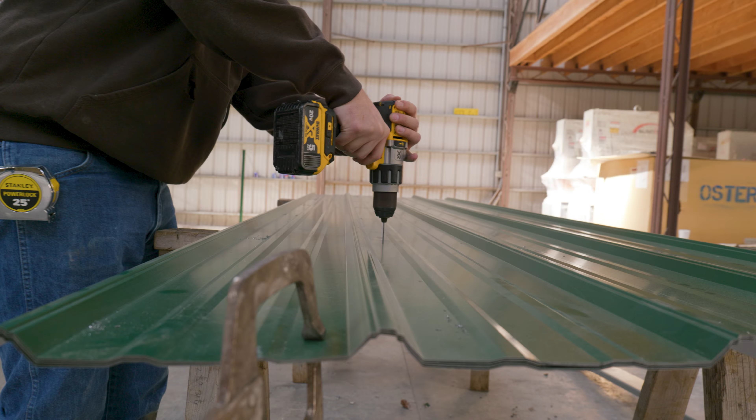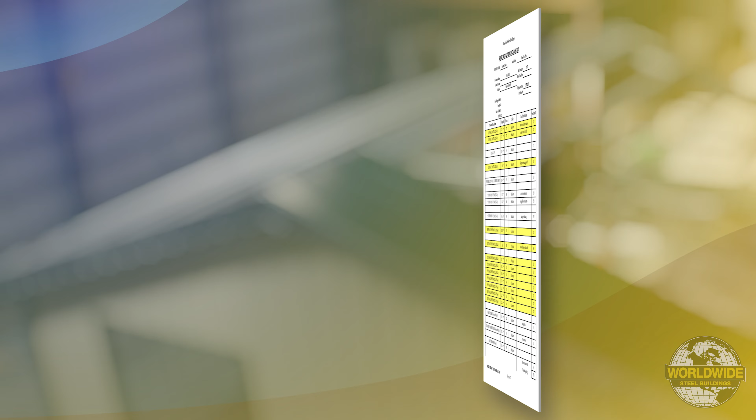Now that your roof panels have been pre-drilled, it's time to install them along your roof. First, you'll need to identify the panels that are supposed to be installed for the roof surface you're working on. Refer to the sheet metal trim package list located in your ship list. This page will indicate what panels and lengths are to be used at each surface of your building.

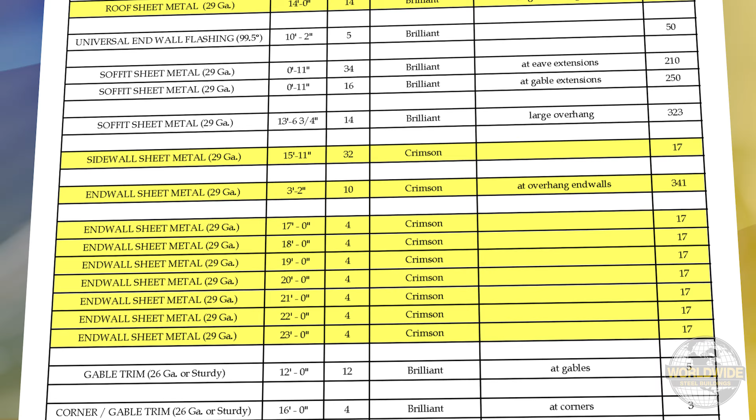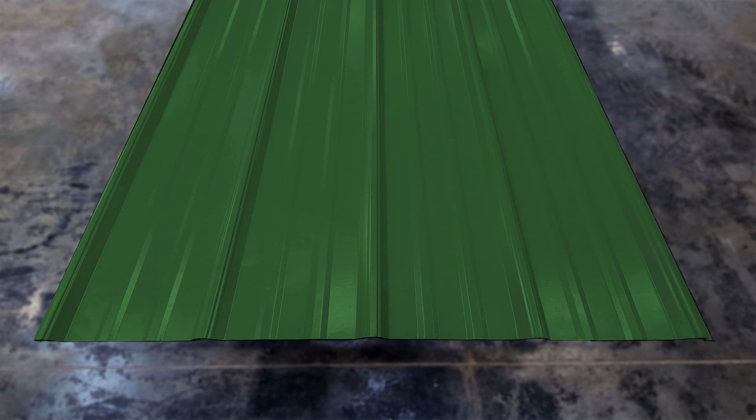Worldwide Steel typically bundles panels together for each surface when you're building, but it's a good idea to verify you have the correct panels before pre-drilling and installing. Worldwide Steel's typical roof panel has a total of 5 high ribs and 8 smaller intermediate ribs. The high ribs are spaced 9 inches apart. The panel is designed to lap and has a 36-inch coverage. This is the dimension from the center of the first high rib to the center of the last high rib.

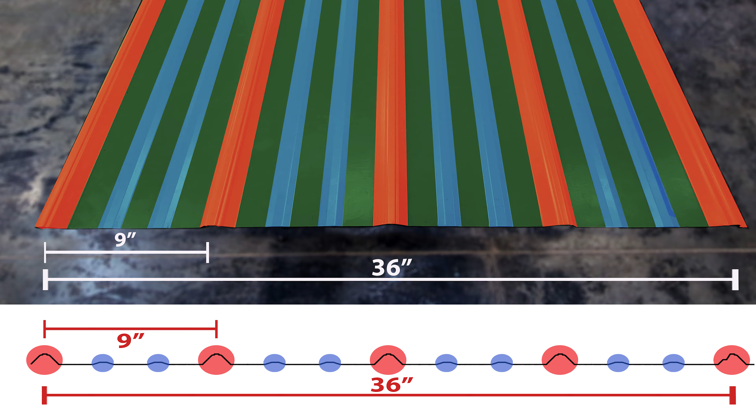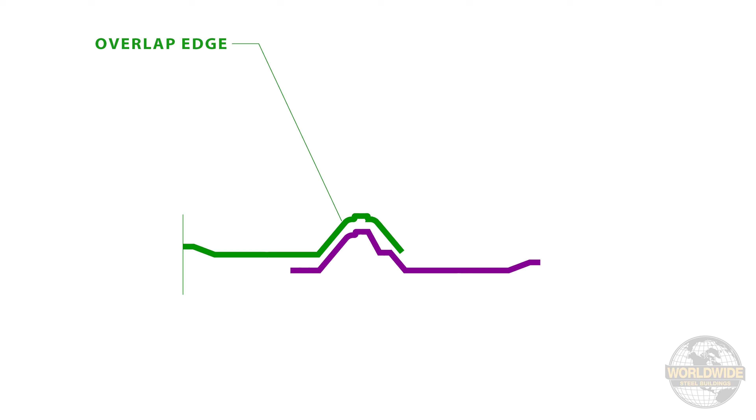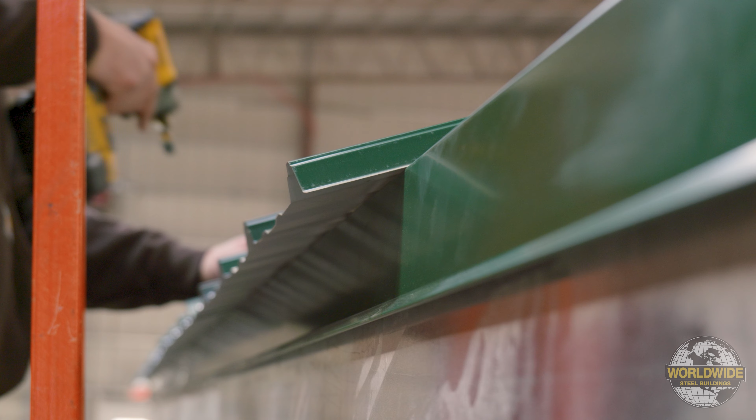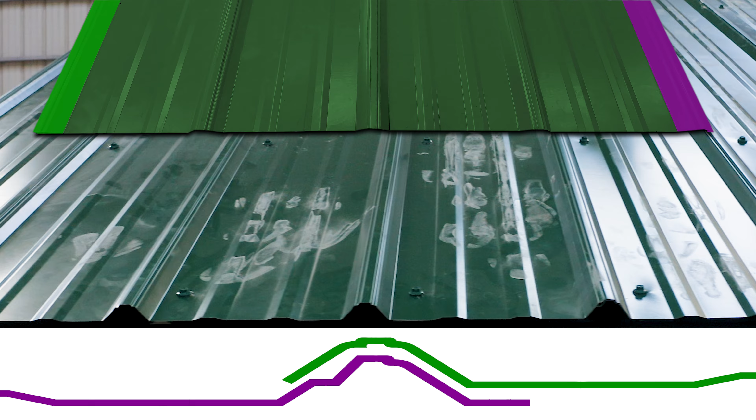One side of your panel is referred to as the overlap edge, which is the side shown here. The other side is referred to as the underlap edge, shown here. When installing your roof panels, you may start from either the left or the right side of your building, working your way along the distance of your roof surface. In our example, we're starting from the left side and working to the right. Therefore, the overlap edge of our panels will be positioned on the left side when stack drilling. If you elect to install from right to left, then your overlap edge will be positioned on the right side.

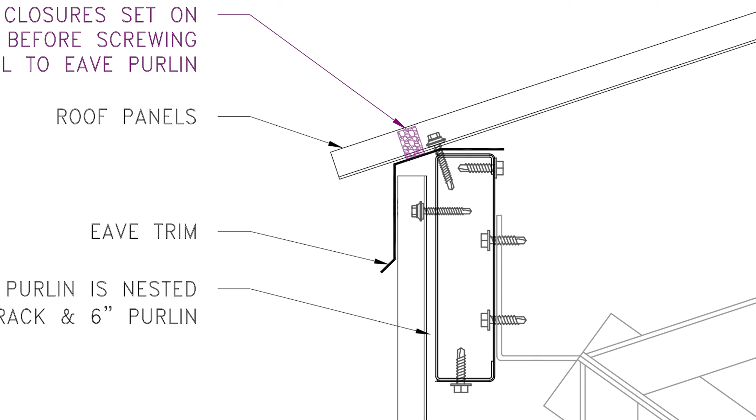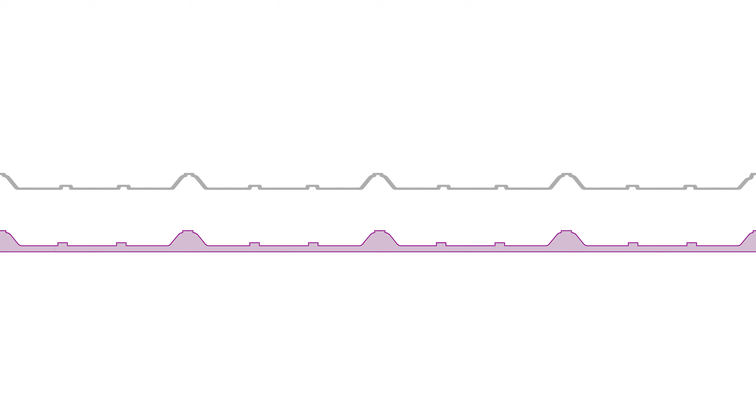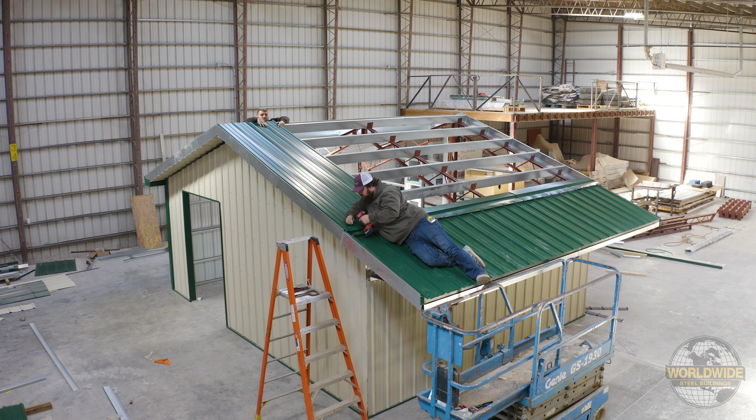Worldwide Steel recommends installing foam closure strips along your eave trim to seal out moisture and pests. When you install your inside foam closure strips, make sure it is aligned with your planned panel layout so that the high rib of the foam strip nests inside the high rib of your panel. Place your first roof panel into position, ensuring that the left edge of your panel lines up with the outside edge of your building. If you pre-drilled your panels correctly, then your holes should line up perfectly with your purlins.

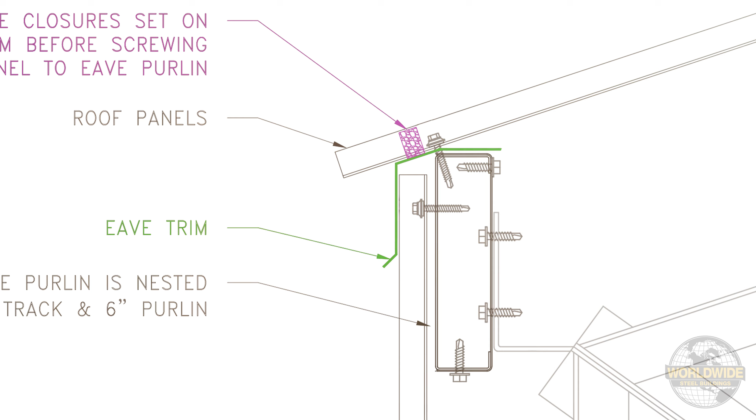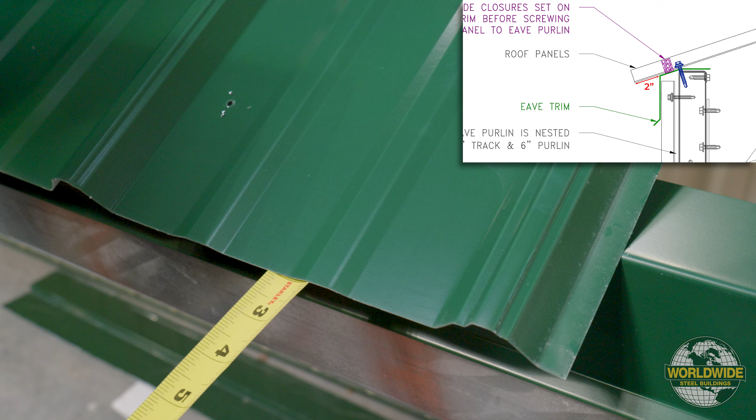If your building has a standard eave as shown here, then your roof panels will require a 2-inch overlap from the eave trim. The 2-inch overlap is critical to ensuring your roof panels are running plumb. Each high rib along the outside edge of the panel should be checked prior to screwing into place. Panels may need to be manipulated in order to continue to run plumb. This step should be done at every panel to ensure a clean look. If your building has step flashing, then please reference the roof panel installation with step flashing video for detailed instructions.

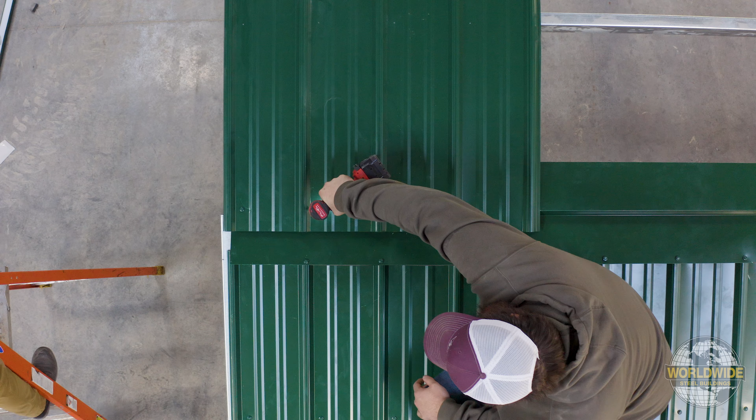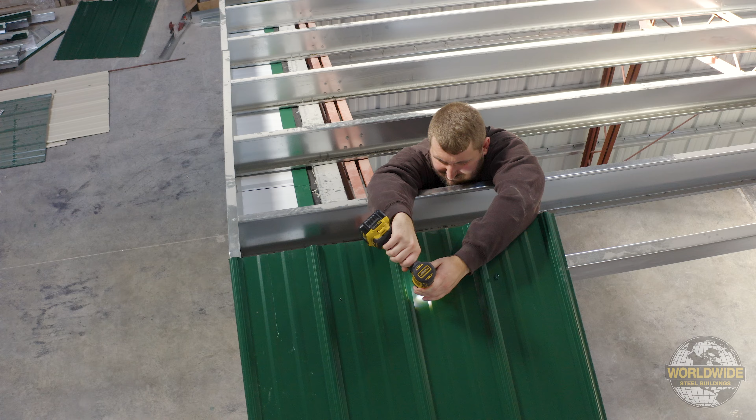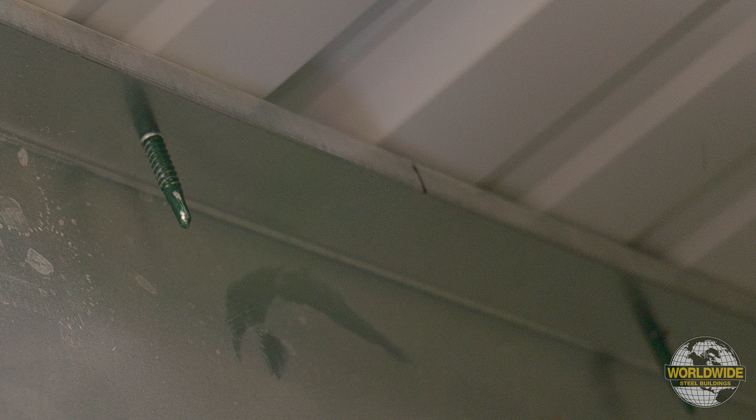Check to ensure that your panel is plumb before securing with painted sheet metal screws along the bottom row, through the eave trim, and into the purlin. Follow with the top row, and finally, the lap seam rows as demonstrated here. When placing your second panel, overlap with the first panel and measure your overhang to ensure it is plumb before securing with screws.

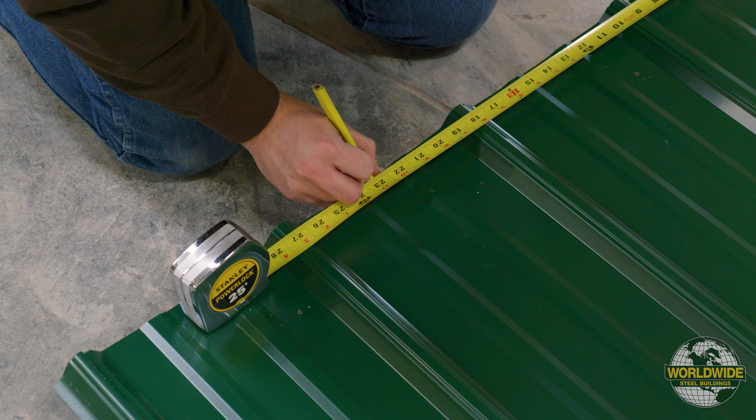When you reach the end of your roof, you may need to trim your final panel so that it ends flush with the edge of your building. Measure the distance, mark your panel, and cut. Place your final panel and secure in place.